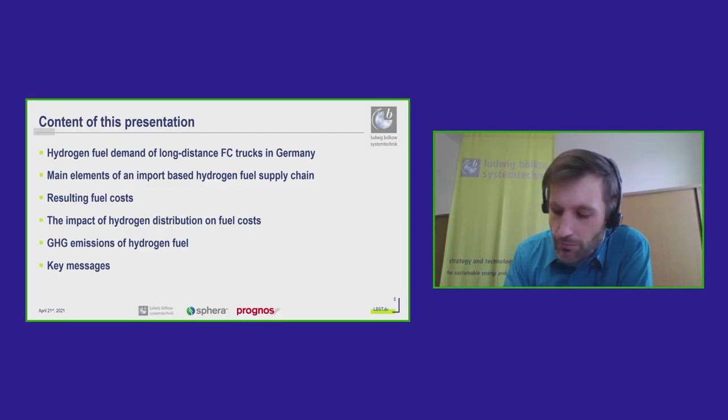Afterwards, there is another very important aspect about the hydrogen fuels we will cover, and that's the related greenhouse gas emissions. At the end, we will wrap things up with some key messages, which I picked up all the way throughout the presentation today. We can move to the next slide, please. Before I go into details, I would like to give a brief overview of the context in which those numbers and this study actually were produced.

Last year, the Daimler Truck AG presented their current fuel cell truck activities, and those include the development of technical foundations for a 40 metric ton long-distance fuel cell truck, and that also includes the certification and the real-world testing of 2 vehicle prototypes. Now, there are a very large number of fuel cell truck activities currently worldwide, also in Europe and in Germany. But there's at least one very important difference between the activities from Daimler and most of the other truck fuel cell activities right now. Daimler in those prototypes will use liquid hydrogen onboard storage to propel their truck. And that's, I think, maybe not the only project worldwide, but one of very few ones.

Now, as part of their in-house development activities, Daimler contracted a study, and that study should take a look at a possible ramp-up scenario for fuel cell trucks in Germany. And that study should also take a close look at the possible fuel supply chain from production all the way to the nozzle, to the dispenser, and here analyze the resulting costs and greenhouse gas emissions. And now that's when we come into play, our consortium. That contract went to a consortium of 3 companies. One of them being the company Prognos, and that company took responsibility for the vehicle rollout scenario and also for the calculation of the overall fuel demand in Germany for those trucks.

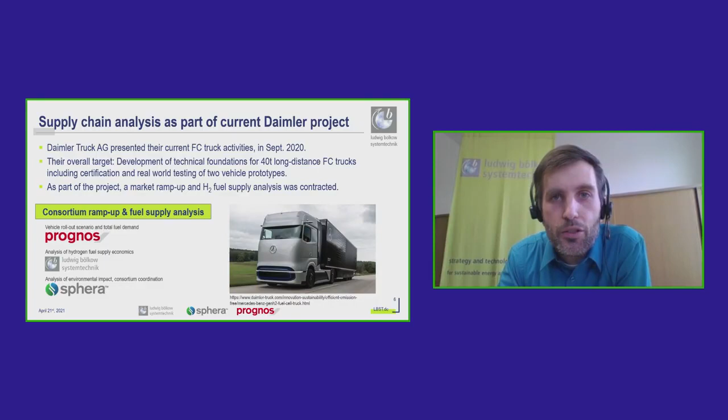Then the company I work for, Ludwig Bölkow Systemtechnik, we were in charge of the supply chain analysis with a focus on the economics. And last but not least, the third company was, or is, Sphera, which had the overall coordination of the consortium and which took responsibility for the environmental analysis. And that's the main context in which the study was produced. And I'm glad that I can present some of the results today in this workshop. Next slide, please.

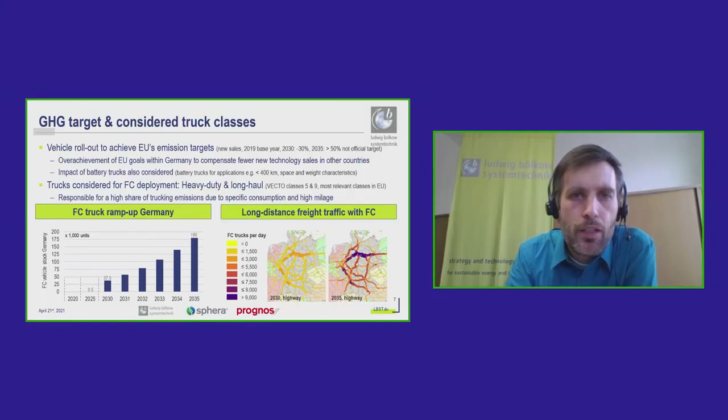Now, before we look onto the detailed numbers of those vehicles, we need to talk about the main drivers in Europe, why fuel cell trucks will come on the roads in the next few years. As you might know, in Europe, we have different greenhouse gas emission targets for the road vehicle sector. There has been one for light-duty vehicles for quite a few years now.

And then in the last year, or last 2 years, there's now also been a target for heavy-duty vehicles, and that target says you have to achieve an emission reduction of minus 30% by 2030 over the base year, and in this case, the base year is 2019, and the 30% reduction relates to new vehicle sales, so new truck sales. That's important to understand.

For our scenario development, we also needed some target for 2035. However, for 2035, there's not an official target yet. So we defined a greenhouse gas emission reduction of new sold vehicles of at least 50% to develop our scenario. Then further, we assumed that within the European Union, Germany will be one of the few countries who will overachieve the goals by 2030 and 2035.

And that's just to compensate for other countries which might have fewer vehicle sales in that time. As mentioned before, the target is an average target over the entire European Union, so you can overachieve in one country and underachieve in another country, and that's allowed.

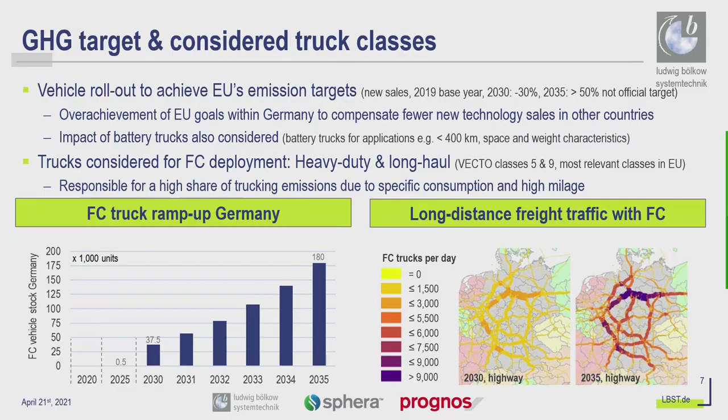Those numbers were used in our study to estimate the quantity and the size of the refueling stations, for example, but also to calculate the overall fuel demand. And that's what we will have a look at on the next slide, please.

Now, based on this fuel cell truck rollout scenario, the calculated fuel demand just for those vehicle classes we consider is 0.3 megatons of hydrogen in 2030, and that quite quickly fivefolds to 1.5 megatons by 2035. Now, it's quite difficult to imagine how much 1.5 megatons of hydrogen are. So I've put down here some numbers to give a good impression of that large quantity of hydrogen fuel.

You could produce 1.5 megatons with 20 gigawatts of electrolysis at about 50% utilization. However, you could also import that with a large hydrogen pipeline with a capacity of about 10 gigawatts, or by importing liquid hydrogen with a liquid hydrogen carrier, for example, from North Africa to Germany, and you would then need 6 carriers. And that does not mean you need 6 loads of hydrogen. No, you need 6 carriers going permanently back and forth between North Africa and Germany to import that amount of green hydrogen. Otherwise, you could also use 1.4 million truckloads of compressed gas, but that's not quite feasible.

Now, if we move to the right-hand side, we see the number for the infrastructure. For this fuel amount, we could use about 750 refueling stations with 8 tons per day each. And out of those stations, about 350 would be located at the highway system. And for comparison's sake, that's very roughly the same amount of refueling stations we currently have on the highway system in Germany. So it would enable a quite extensive network already.

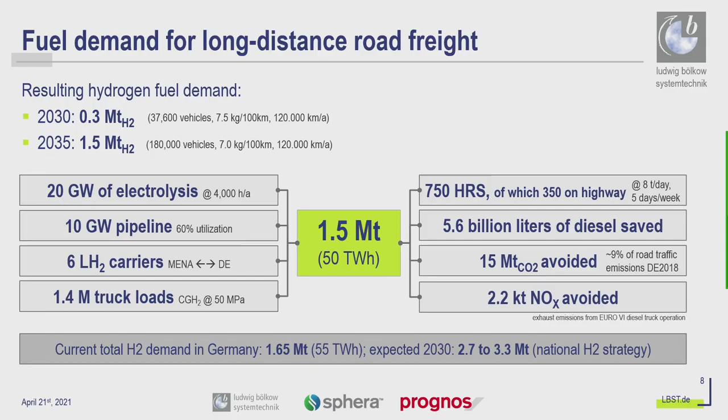Now, on the next slide, you see an overview of the hydrogen fuel supply chains we considered in our study. As mentioned before, Germany has a strong focus on green hydrogen imports, and there are a lot of discussions about importing hydrogen from Australia or from Chile or other countries. So we have considered here quite a large number of countries and supply chains, because for some countries we did not only look at pipeline, but also at LH2 imports or even liquid organic hydrogen carriers.

For today's presentation, I had to pick an example we can look at, because that's just too much to bring into this half hour. So our example for today will be the hydrogen export from Morocco to Germany. And we will look at two cases. The one case will be the pipeline import case via Spain and France to Germany. And the other option will be the liquid hydrogen import via shipping to northern Germany.

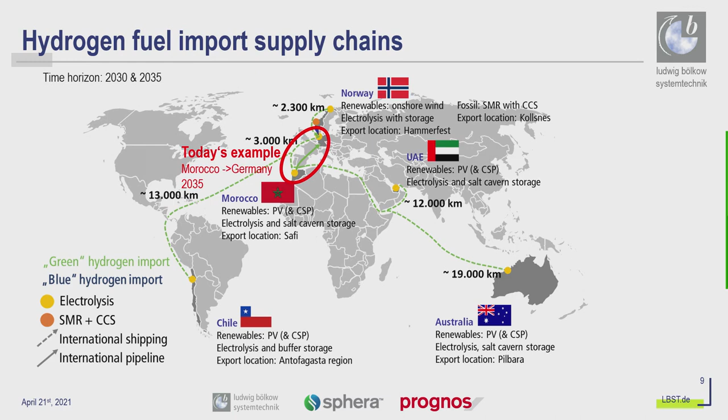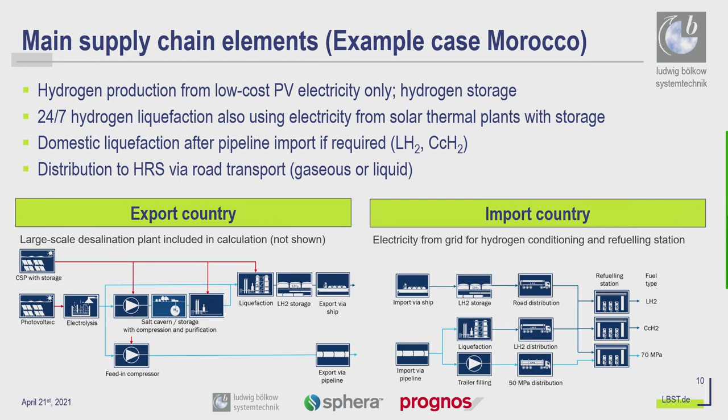You can either feed from this pipeline to a liquefaction plant, and in this case, the liquefaction plant would be powered by electricity from the German grid. And then again, you have the distribution to the different refueling stations. The second option here is to feed from the pipeline to trailer filling facilities for gaseous road transport, for example, at 50 megapascal, which we have considered in our study, to transport the hydrogen to the refueling station for 70 megapascal.

Now, on the next slide, we see on the figure the overall resulting hydrogen fuel costs, and that's costs considering well to nozzle, so everything is included up until the nozzle of the refueling station. And you see on the left two stacked bars, that's for the LH2 shipping and the different fuels, and the right two bars are for the pipeline case.

And in this graphic, and also in all the other graphics following on the slides, we have combined LH2 fuel and CCH2 fuel into one stacked bar. And that's just due to the fact that after our analysis, we have seen that the cost and the emission differences between the LH2 and the CCH2 fuel are really minor. There might be a slight cost premium for the CCH2, also in terms of emission, but it's really minor, and it does not make sense in such a graphic to point that out. So to make it more simple, we have combined those two fuels.

And if you look at the numbers here in this graphic, you can see quite easily that fuel costs of 4 to 5 euro per kilogram are feasible for 70 megapascal fuel, but also for LH2 and CCH2 hydrogen fuels. However, there is a certain cost advantage here for LH2 and CCH2 fuel, and that's indicated by those black downwards arrows. If you compare those stacked bars and their colors, you see this difference mainly comes from the light and dark green, and that's for the road distribution and the refueling station. And as you have seen on the slide before, we have assumed distribution with a truck.

Here we have done a sensitivity analysis, and we have reduced the trucking distance from the import location to the refueling station by adding a national pipeline system. Now, on the left-hand side, you see the assumptions for the base case. For the example of pipeline import from Morocco, you see on the bottom left there's this green arrow, and this is a pipeline that goes to an industrial center in Germany. And from this point, you have this national distribution by truck. And here we have indicated the average transport distances, which from this location to all the refueling stations in Germany would be around about 325 kilometers.

And now if we move to the right-hand graphic, you see those lines. That's the national distribution system by pipeline. And then you have those little red triangles, and those triangles indicate regional hydrogen outlets. Each of those triangles could be a regional liquefier or a trailer facility for gaseous hydrogen road transport. And then, of course, that reduces the transport distance.

And we have done the analysis. If we would assume this hydrogen backbone here, this green one, and that's not our idea to build it like this, that's actually a concept proposed by the European gas transport system operators last year and updated this year, and we've just taken their idea and put it in the graphic and added those liquefiers. That reduces the transport distance from 325 kilometers to 75 kilometers in that case. And that significantly reduces the transport costs, as large-scale pipeline transport is, of course, a lot more cost-efficient than road trailer transport with liquid or gaseous hydrogen.

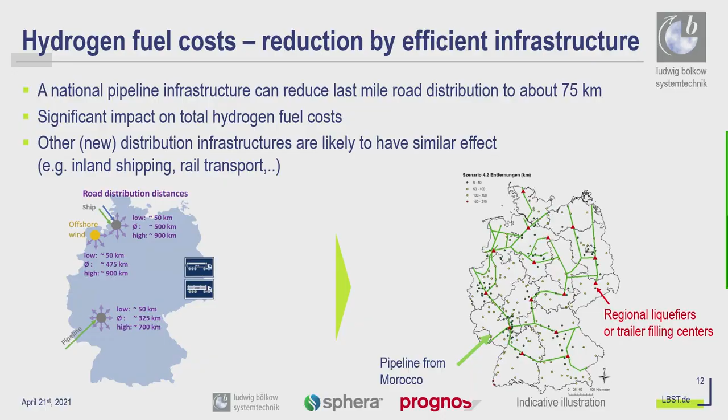Now, on the next slide, we see the impact of this pipeline system, of this sensitivity analysis. The graphic on the left-hand side is still the same as two slides ago. But now on the right-hand side, you see those stacked bars, and that's the result for the supply case with this national hydrogen backbone. You can see that those two bars are reduced, indicated by this black arrow. First of all, you have a rather big decrease for the 70 megapascal fuel, and that's due to the fact that here we have assumed gaseous hydrogen transport by trailer with 50 megapascal, and that's rather expensive compared to liquid hydrogen transport, which is the other stacked bar. And here you only have a rather marginal cost reduction.

But at the end, the cost gap between those three fuels is significantly reduced. In this graphic, you can still see there is some cost advantage of LH2 and CCH2 over 70 megapascal. However, they get really close. And then you could also do the analysis for other distribution options. But you see how important the choice of the last mile distribution option is if you consider the overall import supply chain from hydrogen production in another country, transport to Germany, distribution in Germany, and then refueling station and refueling. The distribution option is really relevant for the overall fuel costs. And by applying a pipeline system, you can reduce those costs compared to the trailer solution.

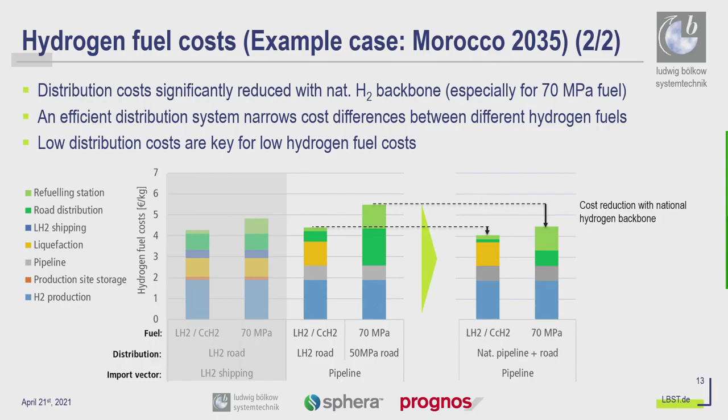Now, having talked about the resulting fuel costs, we can have a look at the greenhouse gas emissions on the next slide, please. First of all, I would like to mention that the greenhouse gas emissions shown include all emissions from production to the nozzle and all CAPEX emissions as well. CAPEX emissions, some know them as gray emissions, are the emissions related to the production of the equipment, such as the production of the photovoltaic module, the pipeline or the refueling station. So that's all included in those figures.

And we see, first of all, the two bars on the left are more or less equal. So again, LH2, CCH2 and 70 megapascal show the same carbon footprint. There is a marginal difference again for 70 megapascal, but you can barely see it in the graphic. And then for the pipeline import case, you see there is some difference, and it's quite obvious where this difference comes from: it's this orange yellowish section, and that's the liquefaction in Germany.

And you remember, I've already mentioned that in this case, where we import hydrogen via pipeline, we have the liquefaction in Germany, and that's powered by grid electricity. And in 2035 in Germany, we still have gas-powered plants on the grid, and also still some coal-powered plants. The coal phase-out is a few years later. So that quite heavily impacts the footprint of this fuel in this case. That's just due to the electricity consumption of the liquefier.

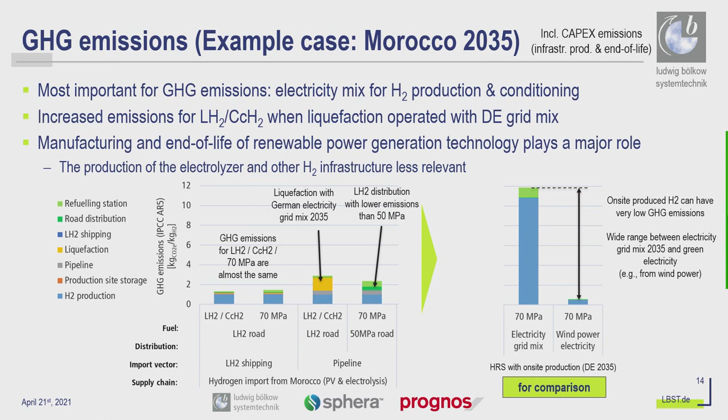Now, let's wrap things up on the last slide, please. Let's have a look at the key messages. Number one, 2035, 1.5 megatons of hydrogen fuel demand just for those two truck classes we considered. And this demand already justifies a nationwide comprehensive refueling network. So no matter what other vehicle classes would do, battery, other forms of hydrogen fuel, just for the long-haul heavy-duty trucks, it would be quite feasible to establish a refueling station network in Germany.

And number two, it could be around about 700 refueling stations, 750, of which 350 are located at the highway system. And then more importantly, number three, by 2035, we can assure that it's possible to achieve fuel costs of below €5 per kilogram for all three hydrogen fuels. And here I have to mention that our assumptions regarding hydrogen production technologies, that means the electrolyzer and also the renewable electricity, are rather conservative in our study.

So if you would look at more recent cost projections for electrolysis and renewables, you could also be more aggressive in terms of cost reduction, and then we could see even lower fuel costs in Germany from imported hydrogen fuels. Or if you would switch to blue hydrogen, that might also enable further cost reductions, at least in the medium term. Number four is also very important, and that's about the compatibility of imports and fuels.

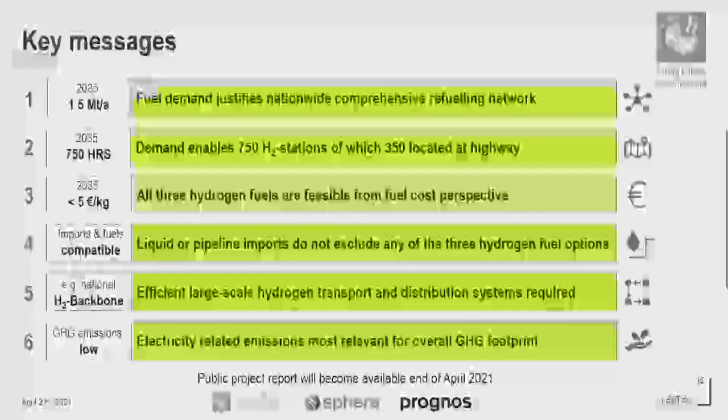Number 5, we have seen that an efficient national distribution infrastructure is required to ensure low hydrogen fuel costs, and that could be a national backbone, or as mentioned, inland shipping or rail transport. And with number 6, we have seen that for all the fuel types, we can achieve quite low greenhouse gas emissions, even if we import the hydrogen.